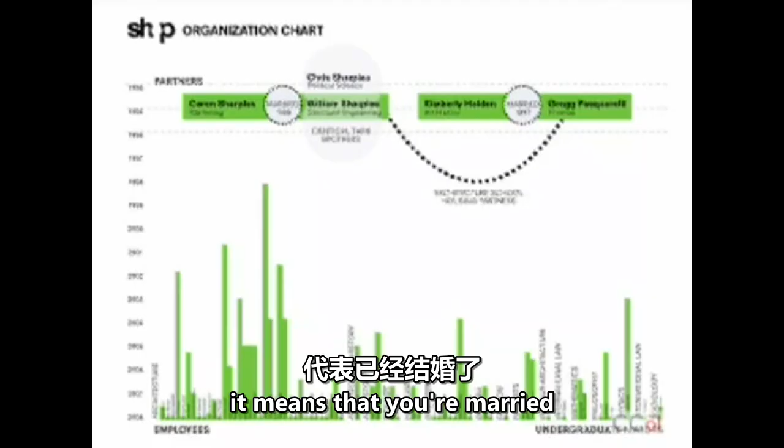All 5 of us went to Columbia, so that's the year we graduated with our MArch degrees. If you're in the green bar, it means you're married and share things like bank accounts. And if you're in the light gray blob, you're identical twins and share things like genetic code.

The partnership actually started when Bill and I were housing partners, which was the one semester at Columbia where you had to work in teams of 2.

One of the other interesting things is that all of us had other careers before we went into architecture—everything from fine arts and engineering to even investment banking. I think that's actually part of what we try to actively recruit at the firm, and here are some of the people who work at SHoP. We really try to look for that kind of diversity and an open think tank mentality, to bring other methods of problem solving from other fields into architecture.

The firm has grown quite a bit. It started with the 5 of us, and as of 2007 we were about 65. We actually grew to about 80. We're back down to around 60 at this point, and hopefully getting back to 80 very quickly.

But the 5 of us didn't really have a common stylistic sense. Because we came from other fields, we were a little confused, especially in the late 80s, early 90s, by architectural discourse, and the way architecture had been divided in the second half of the 20th century between paper architects—the people producing culture, thinking, and fantastic design—and service architects, the people who could actually put buildings together and knew how to get things done.

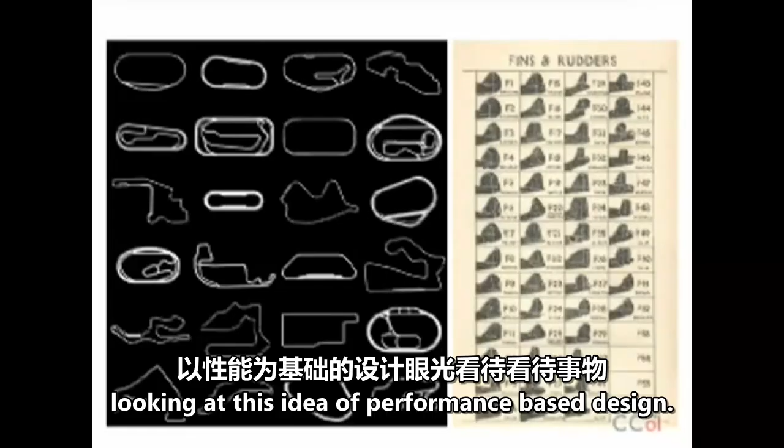One of the key things was that we wanted to move beyond a kind of style, so we started looking at this idea of performance-based design—design that wasn't coming from an image, but really trying to figure out how buildings worked, what they did, and how form could influence those things.

This was around 1996, and we were really looking at aerospace and the automotive industry as places where, although certainly not perfect, performance-based design was most engaged as a kind of thinking and a way of making that relationship between form and performance. And of course, the most classic place where performance-based design succeeds and fails is in nature.

We started to get this relationship down and got excited because we realized that when things worked well, they also sort of looked good.

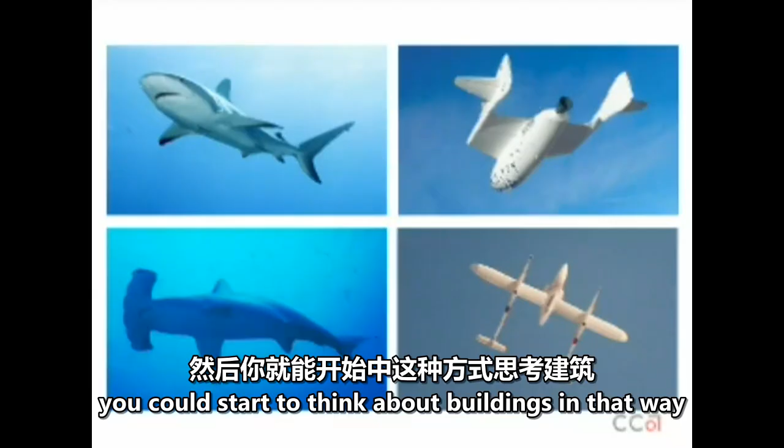And that was kind of exciting to us, that you could start to think about buildings in that way, and really began to use the emerging digital technology in the mid-90s, which was fast enough for us to begin to do simulations to really test if form and performance had a strong connection.

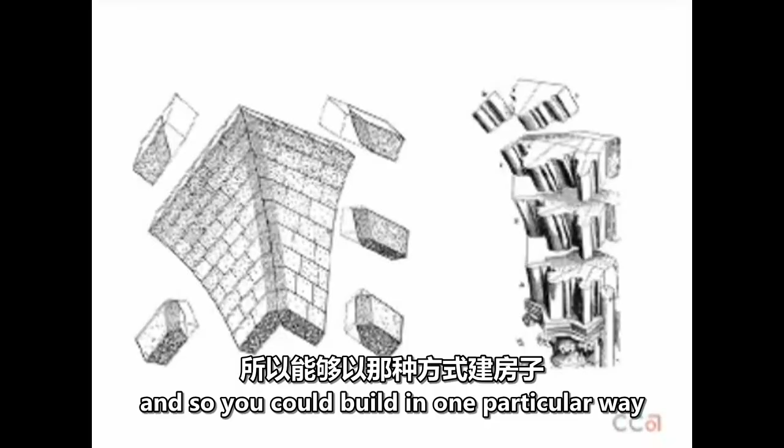Of course, we looked at the history of architecture and the production of material, form, and ornament and its connection to technology, and we saw these long-standing relationships. Even though the output from these experiments was often complex form, and there was this incredibly long history of complex form in architecture, the key thing was that when complex form was being made this way, it was all based on labor. Materials were expensive and labor was cheap, so you could build in one particular way. But in the latter parts of the 20th century and currently, it's labor that's expensive and materials that are cheap.

Very early on, we realized that the only way we were going to get some of this built, especially as a young firm that wasn't going to command the budgets that more established architects would get, would be to take advantage of CNC technology. So in 98, 99, 2000, we decided to invest all of our thinking into CNC technology and to start using the computer as a way to fabricate this, and to try and get towards the idea of mass customization.

Now one of the things that we started to realize, and I'll show it to you as we go through some of the projects, was that the notion of plan, section, and elevation really became a kind of limited language to us. There's something we're really trying to challenge there, and a lot of the investigation and research of the firm has gone into the idea of reevaluating if that's the best method for us to get our ideas across to the people who need to fabricate and build buildings.

For us, it really was never the form that mattered. It was how something was made and what it did that mattered to us the most. And the more we pushed into this realm, the more we realized we were kind of just going backwards in a way towards a kind of master builder sensibility, if you will.

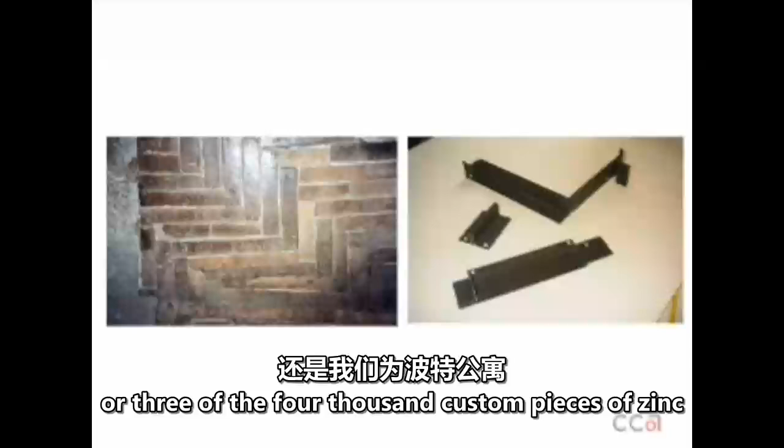So whether it's a few of the bricks from Brunelleschi's dome, or 3 of the 4,000 custom pieces of zinc we made for the Porter House, we realized that there were territories that had been given up by architecture over the past 30, 40, 50 years, and that it was time for us to start to grab them back and take responsibility and take risk and rethink the way in which architects could practice in order to push the limits of design.

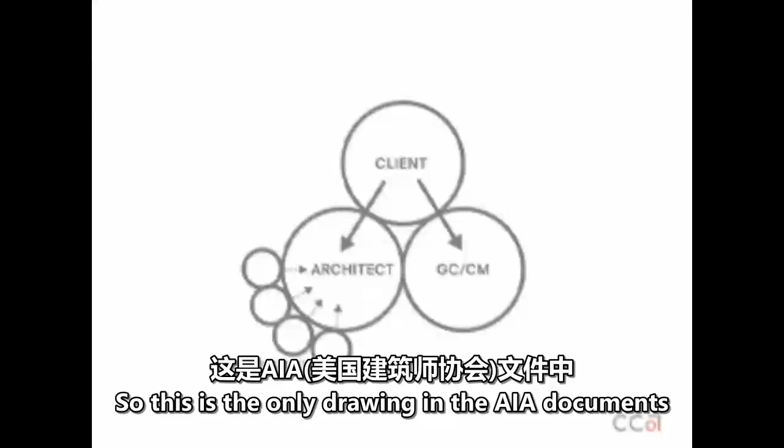So this is the only drawing in the AIA documents, and we have determined that this is the worst drawing ever made in the history of mankind. This is a drawing that is made by lawyers to try and make architects and owners and contractors fight in order to force them to have work for the rest of their lives. And I'm not kidding, I'm not being facetious.

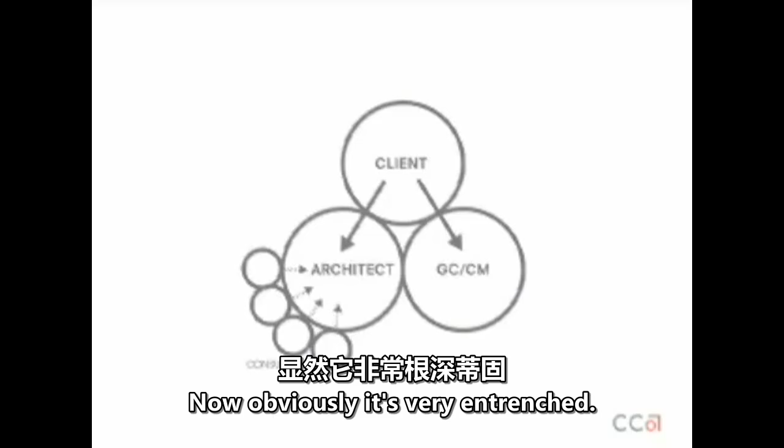So I think a lot of the way we've started to really push practice in thinking about it was to try and challenge this diagram. Now, obviously, it's very entrenched, and there are a lot of things you have to watch out for as you do it. But I think step by step, and what I'll show tonight is 6 or 7 projects that talk about how a young office tried to grab these things.

And just in each project, take one little step with R&D that both pushed the architecture, pushed the technology, and pushed this kind of structure behind the way in which things get made.

So very early on, I think the earliest one, and kind of the most obvious way to start, was absorbing the consultants into the design process. Now, of course, we're bringing the engineers in and the mechanical and structural guys, but it wasn't really that. It was actually bringing the fabricators and even the subcontractors into the office before we would even design anything.

So by saying, well, if we want to make something out of metal, let's bring metal workers in. How big are the sheets? How do you fold them? How do you clip them? What are the 8 ways I can bend it? What makes a bend expensive? What makes a bend cheap? How many sheets come in a package?

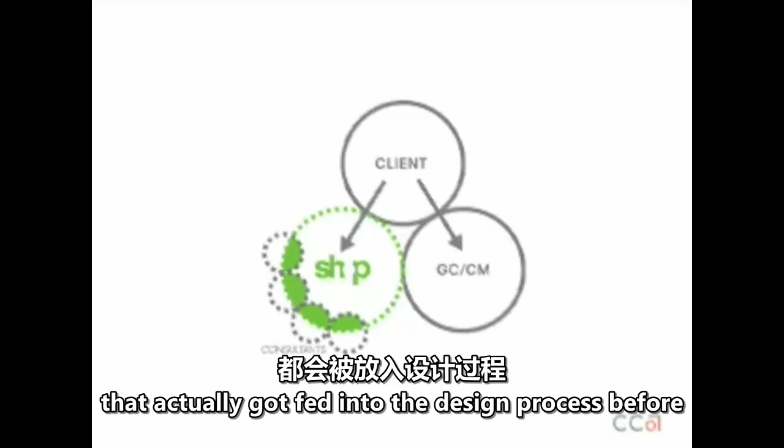And all those kinds of parameters were things that actually got fed into the design process before we ever sketched what we thought the building would be. I think that was an attitude we took right from the beginning that actually drove a lot of the work as it went forward.

Isla mentioned PS1, which we won in 2000, the summer of 2000. Most people are familiar with this competition at this point. The year before we won it, a young architect named Philip Johnson won it, which was interesting. They got about 2,000 people per weekend out to PS1 for this party called Warm Up. Alanna Heiss, the director of PS1, and Terry Riley, who at the time was the architecture curator at MoMA, said we should use this as an opportunity to let young architects experiment in the spirit of the houses that were built in the garden at Museum of Modern Art.

So our program was an urban beach, and the first question we asked was, how would you think about that performatively, and do you need sand and water in order to have an urban beach? We said, not really. If you had shaded areas, places to change, places to sit, places to move and dance, and places to get wet, you would in fact have a beach. So the idea was to take a series of surfaces and mutate those surfaces so that the program could evolve along those surfaces and the spaces that it captured.

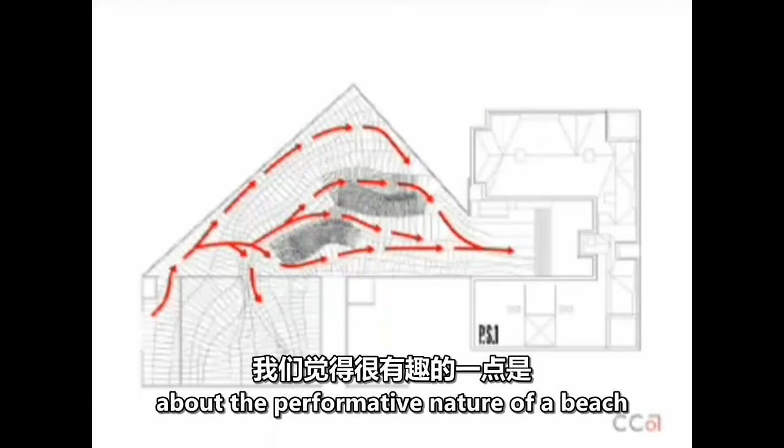Now, the other thing that we thought was interesting about the performative nature of a beach was the idea of the promenade. The fact that you either sit on the beach and watch everyone walk by, or you go for a walk and look for your friends, and there's always that interaction that occurs on a beach.

So this is the courtyard at PS1. Here's the museum. You enter here, this is the ticket booth, and then you go up these stairs, and that's actually the front door, and this is the sculpture garden. So we placed the architecture in such a way that the people hanging out at Dunescape during the day were the ones sitting on the beach, and the unsuspecting museum goers passed through the architecture in such a way that they became the promenaders.

And we had 3 weeks to design it and 3 weeks to build it, and a budget of $50,000 for an 8,000 square foot space. So we said, well, we better make it simple. It's the only way to do it.

So we said, let's take just one structural element, 2 by 2 sticks of cedar, and set them up in an AB configuration, the connection point being the spline that we pushed and pulled in order to make the surface bend and move so every one of those programs could unfold on the surface. This was the first sketch of that, and these were the early models. This is actually the model of the element. The reds are the A's, the blues are the B's.

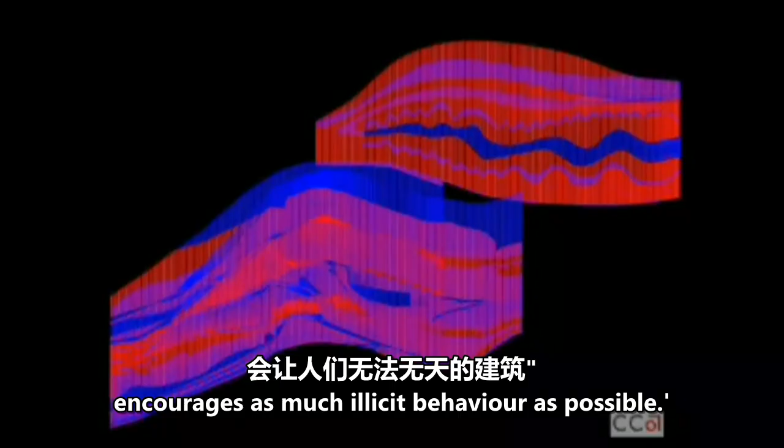And Alanna Heiss, she was a great client. She said to us, I'd like you to produce an architecture that encourages as much illicit behavior as possible. So we said, well, what do you mean by that? And she said, I'd like people to take off their clothes and smoke as much as possible. So we actually embedded huge ashtrays right into the thickness of the walls themselves, and all of the dimensions were taken for dimensions of the human body, meant for people to overlap and continually touch while they were involved in the architecture itself.

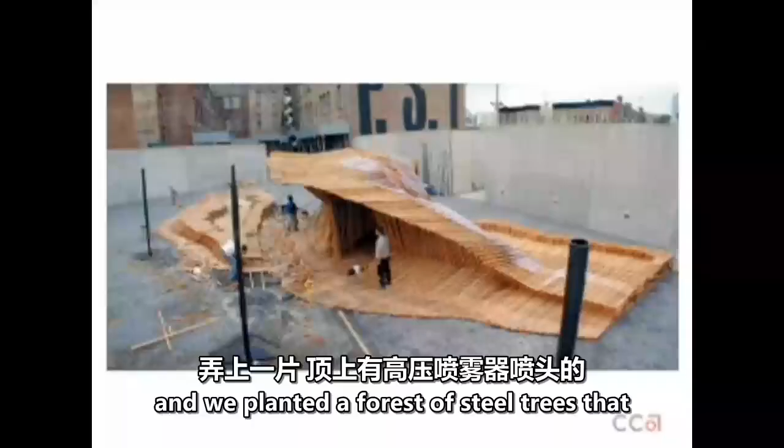And then we dug in the courtyard, and we planted a forest of steel trees that had high-pressure mister heads on top. Here's the Dunescape when it was finished. About every 15 or 20 minutes, they would blast and fill the entire courtyard with mist, which, as you were lying there baking in the sun, would be like the spray off the ocean, and would hit the cedar and wet it, giving this incredible smell to the whole courtyard.

But here you could start to see the kind of smooth transition from a bench to a wall, or from a shaded area to a pool.

This was the night before the opening. They gave us the courtyard for one night, so we filled the pool with beer and had our own party.

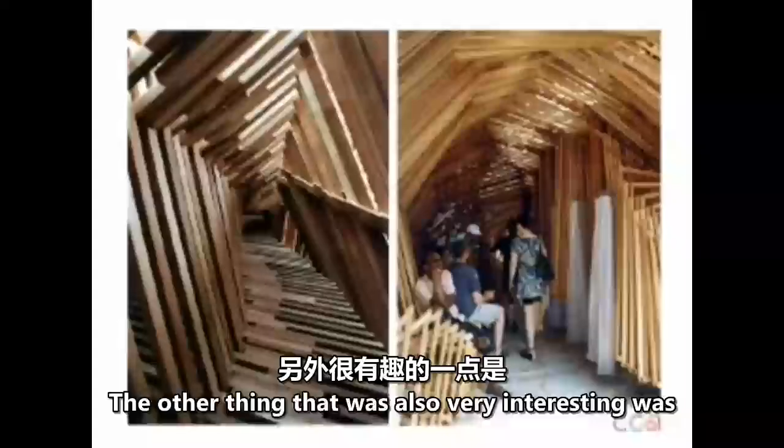And then these were some of the interior spaces. The other thing that was also very interesting was we developed a series of secret chambers inside the thickness of the structure itself, designed for 2 or 3 people at a time, that you could crawl inside and see everybody at the party, but nobody could see you. They were unbelievably well used all summer long.

And this was a typical day at Dunescape. And the interesting thing that happened was we got a lot of press from this, and people were excited about the architecture. We had so many articles that it actually drew more than 8,000 people per weekend.

As the summer was winding down, I was sitting there hanging out, and I said, that's interesting. 6,000 additional people times 10 weeks times $10 admission plus 3 beers and a hot dog or hamburger average, and suddenly I realized we generated about $1 million in additional revenue for the museum that year, and our fee was $12,000.

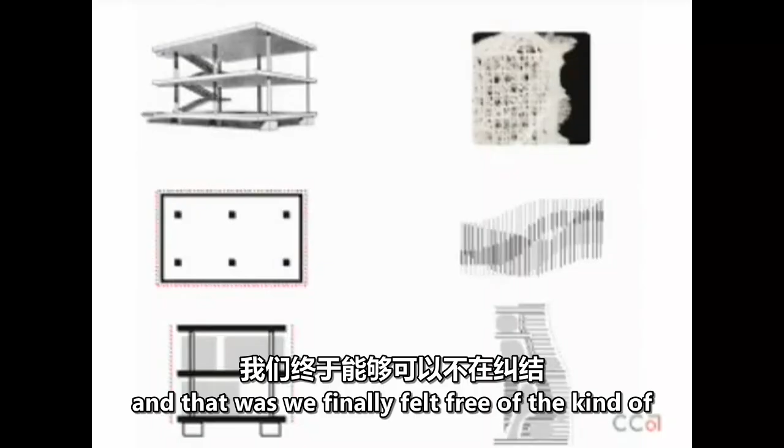And I said, something's really wrong with this architecture thing. We've got to try and fix it. But I think there was something very interesting that happened at that moment for us, and that was we finally felt free of the kind of modernist canon of the separation of structure, skin, and program.

We started to get very interested in the notion of thickness - the idea that surface, structure, and program could be blended into a single thickness that could be mass-produced and mass-customized, if you will. It's really still the idea pushing a lot of the work we're doing in the office today. So from a very little project, it's now working on projects anywhere between $500 million and $1 billion currently in the office.

Talking about that journey, I think there were certain things we did learn that we applied to some other little projects right around that time. Richard Branson saw PS1 and asked us to do the first-class lounge for Virgin at Kennedy Airport.

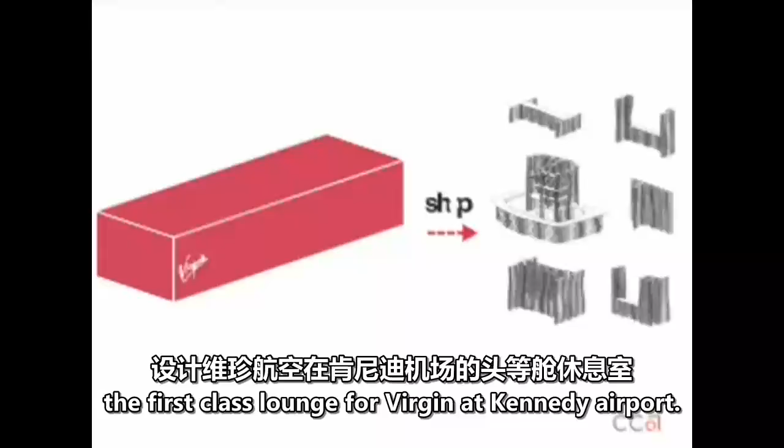The idea is that typically a first-class lounge is behind a closed door and you never see it. The idea here was to make a first-class lounge that was almost a billboard, an aspirational billboard, if you will, that you could see but couldn't really get into, that might encourage you to upgrade to a first-class ticket.

It's funny, I just saw this for the first time in a year because I took Virgin Atlantic out this morning, and I knew something was missing. They removed that part. Anyway...

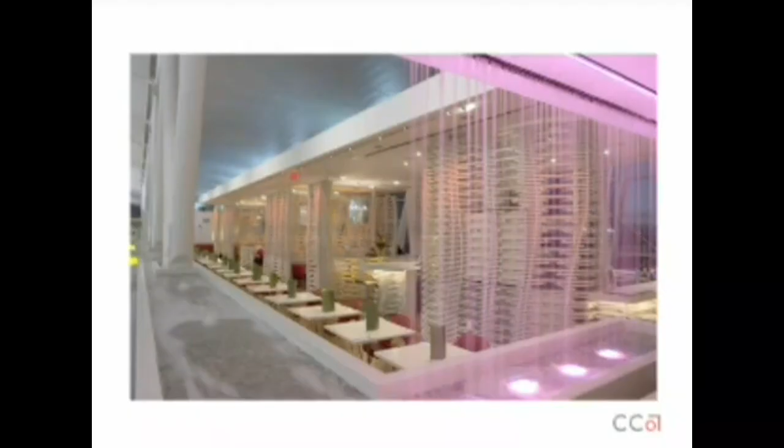You check in over here, and you can see right through the screen out to the runway through this lattice work that holds the lighting and the structure and all the forms. But as you move into the space, a kind of moire pattern emerges that gives a certain intimacy to the spaces themselves. There's a waterfall and a stream that blocks the sound qualities of the airport.

Can you see that? Yeah, you can. So again, this was one of the first times we really got into developing nesting drawings for the mill to fabricate pieces.

All the parts were made into component pieces that could be delivered to the airport and assembled in a certain sequence that would get us around a series of rules with the Port Authority.

And there's a whole lighting system that goes from yellow to orange to red that's timed with when the flights to London are leaving. So the redder the whole space becomes, the faster you have to run to the gate to get there.

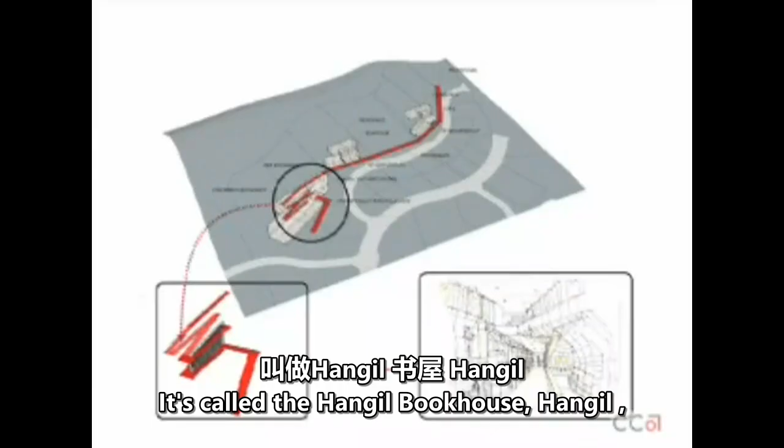It also brought us to a project we did outside of Seoul, Korea. It's called the Hangil-sa Book House. Hangil-sa is sort of like the Rizzoli of Korea in a way, and it's part of the Heyri Art Valley complex.

You actually come off the hillside and enter the building at the top, and then walk down a ramp around a 3-story high wall of books that are the bookstore itself, and come down into a kind of restaurant and cafe space. And there's a sculpture garden here.

We prepared all these drawings, and it got fabricated in Korea and assembled like a kit, and it worked pretty well. Here you could see the bookstore as you come down and move around, and sort of what the building looks like at night.

The more we were getting involved in this, the more we realized there was a lot we were doing with the contractors and the construction managers to actually get this stuff built. On one project, Mitchell Park, which was a competition we actually got third place in but eventually got the commission to do, out on the eastern end of Long Island, about 120 miles from New York City.

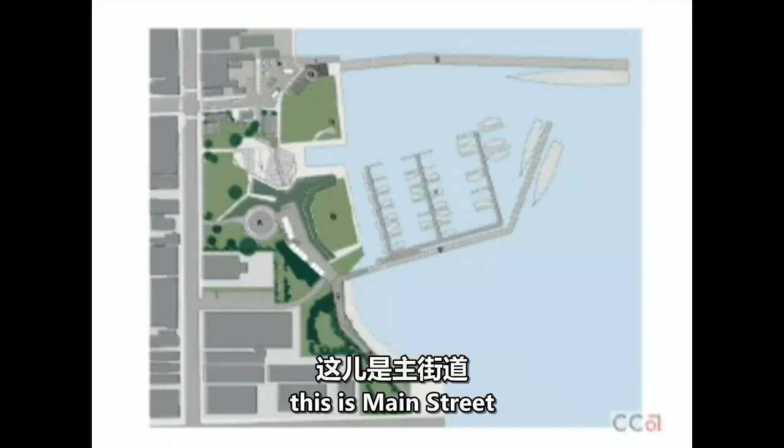It's a rural fishing village. They had a 4-acre open spot. This is Main Street, and that's Front Street there. There was a big open lot, and they held a competition to build a park. They had a series of programs they suggested, but really only a few they insisted upon, and the key one was a carousel.

The town's prized possession was an antique carousel given to them by the Grumman Corporation in the 60s. It sat in a Butler building right here on the corner, and they charged $1 a ride, getting about 1,000 rides a month.

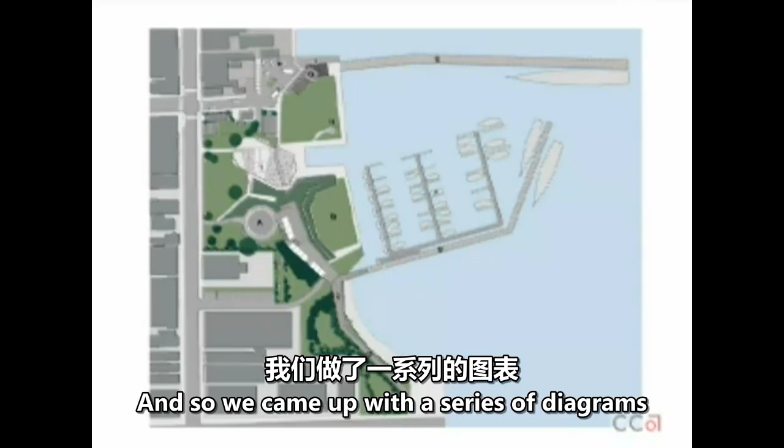So they wanted a new carousel house in the park, and of course they wanted it to be a Victorian carousel house. We came up with a series of diagrams, and this idea of almost like a chain that went through the middle of the park, a necklace, and all the programs linked off of it.

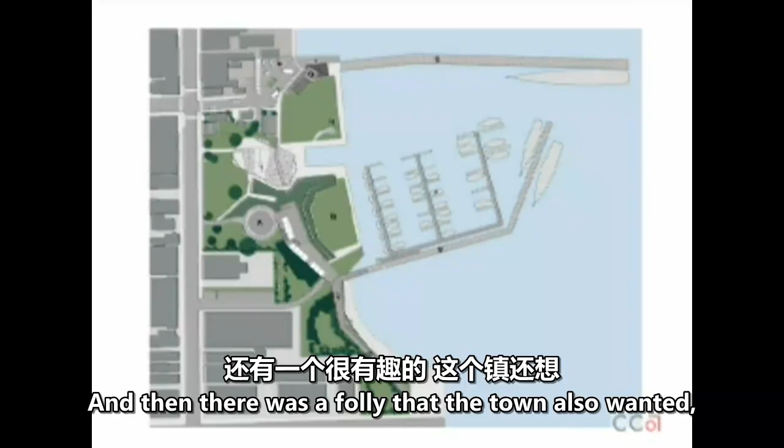There was an amphitheater, the harbor walk, a shade pavilion, and a water garden that turns into a hockey rink in the wintertime, and some playing fields. Then this is a ferry terminal. And then there was a folly the town also wanted - they wanted a camera obscura, but I'll talk about that in a minute.

So we worked on it. Here it is. It actually took 8 years from start to finish. We eventually wrote grants for the town. It was built in 3 phases. We did soil remediation ourselves - we got licensed to actually do soil remediation in the state of New York because we couldn't get anyone to do it.

We built this carousel house, made of 16-foot high by 16-foot wide bifold steel and glass doors that work on a worm drive and respond to the local weather patterns on the site. As the prevailing winds come off the water, it closes down. On hot days, it opens up.

In the winter, it's completely enclosed, but it can operate all year long. Just by writing the performative rules of what this piece was, we actually convinced the town that this was, in fact, a Victorian carousel house.

Here's the ferry terminal and the harbor master's house. You can see the water garden in action over there. Here's the water garden at night, and the shade pavilions where they have farmers markets on the weekends. And then in the wintertime when it turns into a skating rink.

And then the last piece that we were going to make - we started this project in '97, and this was now about 2000, well, we started working on this maybe around 2001 or 2.

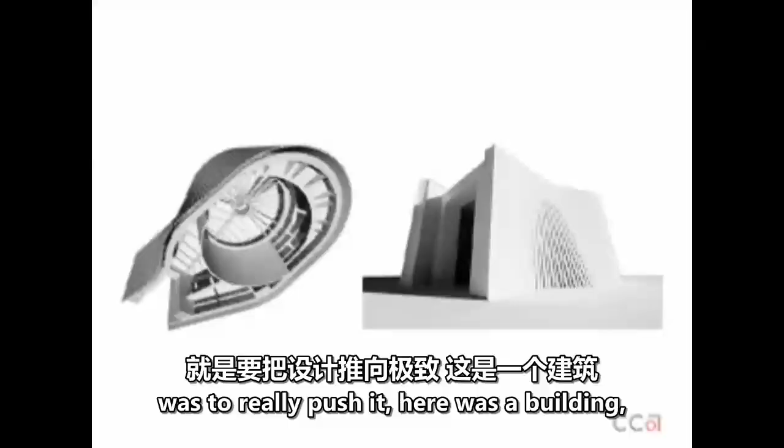I think the idea for the camera obscura was to really push it. Here was a building - we'd learned enough about using the technology, and it was a small enough building, and we had gained enough trust with the client that we really wanted to push it to see if we could make a sort of pure performance envelope.

We wanted to see if we could have the entire building fabricated by the computer. So there was a certain series of programmatic requirements. We tried a kind of minimum surface form. This was sort of BIM version 0.01, where we just modeled every single piece for the building. And these are the construction documents.

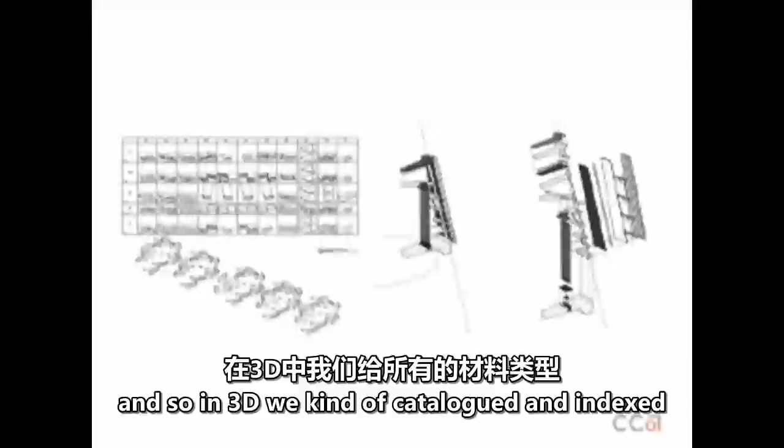In 3D, we cataloged and indexed all the different material types so you could see where they went. There were basically 2 kinds of drawings in the set: drawings that explained to the computer how to make the parts, and drawings to the contractor how to assemble them.

We basically produced the whole set, and when we were done - these are the actual construction documents. There's nothing, these are not presentation drawings. These are taken straight from the set. You know, fold, weld, bolt, screw.

And the interesting thing is, when we were finished with it, we looked and realized there were no dimension strings on the whole set of drawings, because they were totally irrelevant.

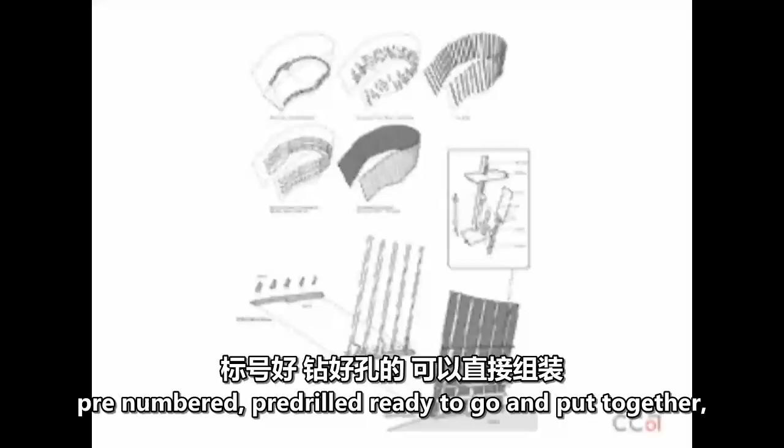Every single piece arrives on site pre-cut, pre-numbered, pre-drilled, ready to go and put together. In fact, the worst day on the construction site was when Mark Hours, one of our guys, heard one of the contractors start a saw and ran out yelling don't cut anything, because the guy had actually just picked up the wrong piece, and it didn't fit, so he was going to trim it to make it fit. But there was no saw needed, and in fact the contractors didn't have tape measures on their belts for the whole process because they were irrelevant.

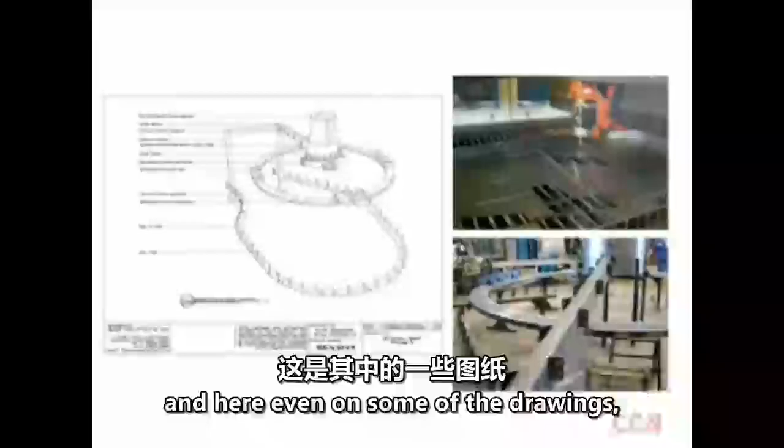So here are even some of the drawings. You can see the equipment making the pieces, even the templates. These are the flanges on the compression ring, and we laser cut into the parts instruction sets on where the welds go and which piece lines up where. It was all there to make them look at the drawings as infrequently as possible, and just be able to build it like the most kick-ass piece of IKEA furniture you can imagine.

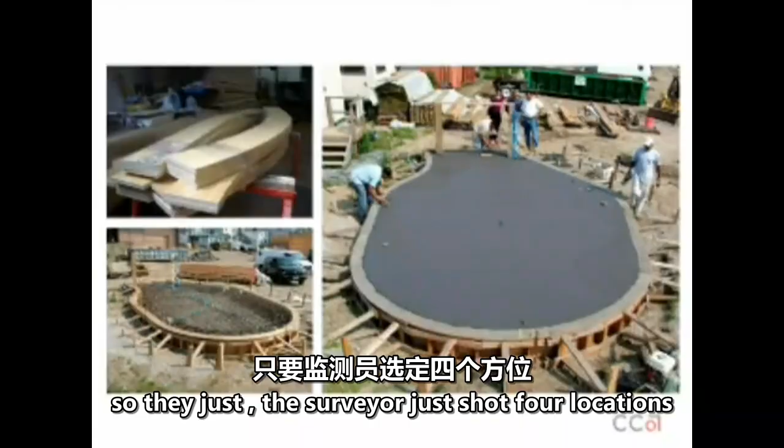And even the formwork was all milled as well. So the surveyor just shot 4 locations and then full-scale templated it out. They dug the hole and assembled the pieces, and I think it was 4 guys who built it in about 7 or 8 weeks. And the piece went together. And that's sort of the interior.

And it was a really phenomenal thing for us, because we realized for the first time that, okay, there's something here — you can actually build buildings this way. I mean, no one is ever suggesting that you build a 45-story building like this; that's not the point. But what you can do is find the critical parts of your building and invest a tremendous amount of time into thinking about how to do things this way, and then a lot of the rest of the building can be built in very standard methodologies. You could really see that this was something that was going to pay off a lot for our profession into the future, and it gave us a lot of confidence to move forward into larger projects.

So we started realizing that we were really doing a lot of good things for our clients, and also making the money. The last thing was that on the park they were getting 1,000 rides per month, and now with this new Victorian carousel house that they love so much, they get upwards of 50,000 rides a month in the summer, and it's actually up to $2 a ride now. So it's generating hundreds and hundreds of thousands of dollars for the town, and they've planted flowers up and down the whole main street, and their real estate market's gone through the roof, and it's even held on in the downturn.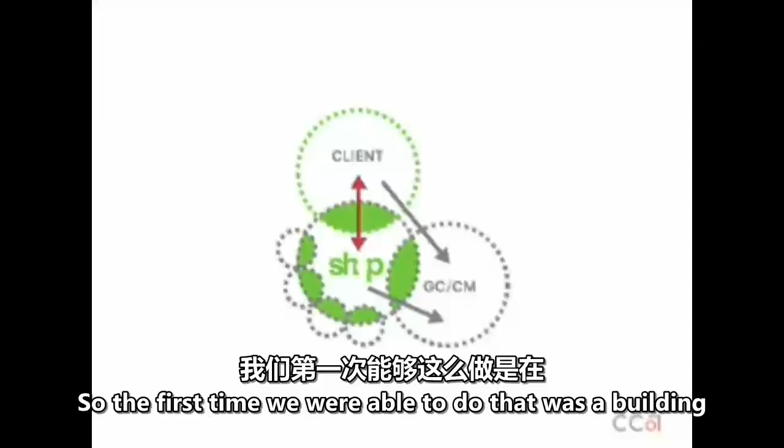So with that said, we started thinking, is there a way that we should start to team with our clients, where if we're coming up with all these ideas that are solving problems and turning design from a cost center to a profit center, should we begin to joint venture with our clients and be able to take the risk along with them? So the first time we were able to do that was a building called the Porter House.

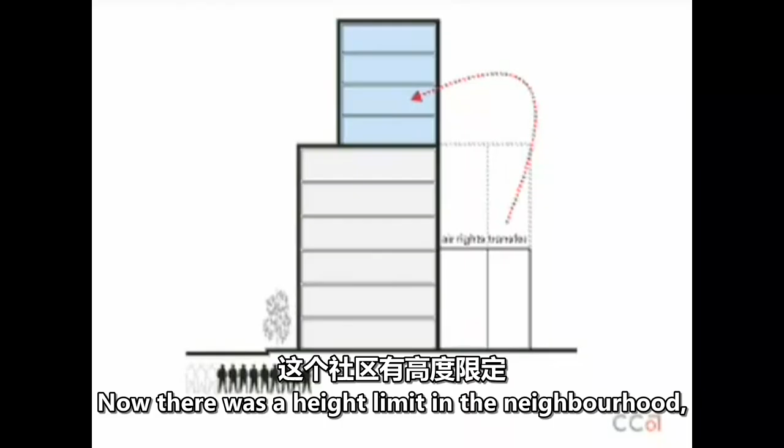It was in the Meatpacking District of New York, and there were 10 developers fighting for a 6-story turn-of-the-century warehouse building. The owner was trying to sell it and obviously wanted the most money for it, and I think everyone was trying to think about how they could raise their bid to get control of this building. There were 2 smaller historic buildings to the south, and this building was built to its full FAR. Maybe 7 out of the 10 developers thought about doing the air rights transfer. Now, there was a height limit in the neighborhood, and there's also a setback requirement from the street, so that was the sort of first thought — how much air rights we could transfer.

But then the next idea was the only way to increase the size of this addition, and therefore the potential revenue down the road, which would give you a little bit more money to outbid the other developers, was to cantilever over these two historic buildings to the south.

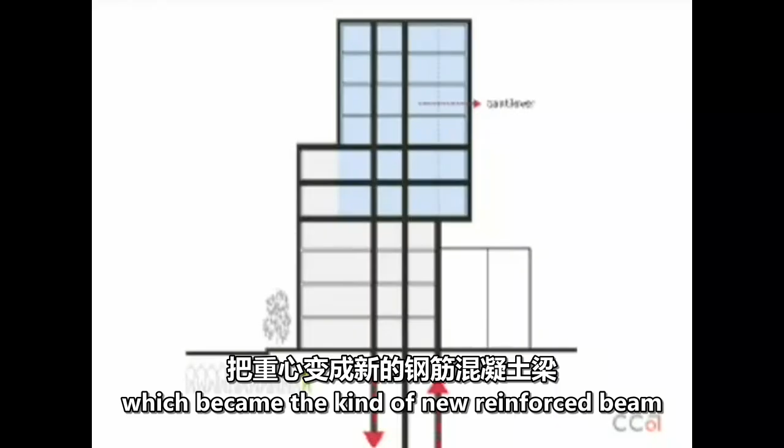Working with Buro Happold, our structural engineers, we came up with an interesting way of moving the core, which became the new reinforced beam, and we put a sort of three-story Vierendeel by building a six-story new building onto the six-story old building, but overlapping on two floors, to in a very inexpensive way get that cantilever out a little bit further. Those extra couple feet were enough additional revenue to allow us to be the last one who could bid the most to get control of the building.

So we didn't really have the money to do any of this, but we went for it anyway. We approached one of our clients and said, do you want a joint venture on this? And they said yeah, it's really interesting, Jeffrey Brown. So we were going to take this new box and put it on top of a historic building.

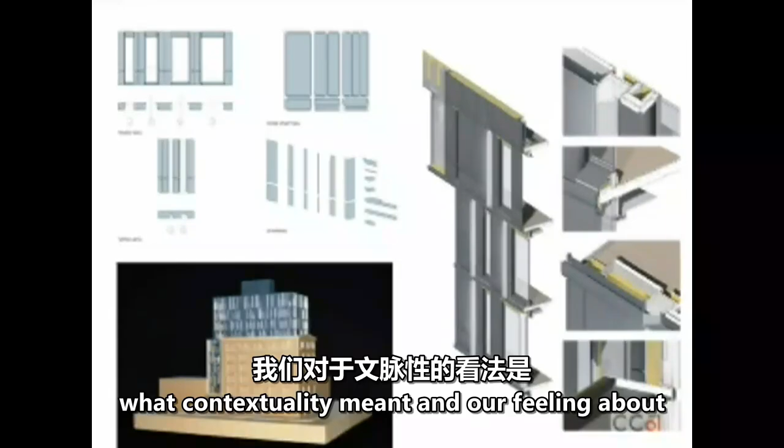I think we really wanted to push the idea of what contextuality meant. Our feeling about contextuality was that it shouldn't be contextual at all. So we took an idea where we said, let's make it zinc. We wanted to use zinc and make a metal panel building. We hadn't tried that yet.

So we talked to lots of zinc fabricators, and the prices were ridiculously expensive. So what we did was we actually went to France, where most zinc comes from, and bought one meter by three meter sheets of zinc, about 1,000 of them. We designed the panels in such a way that one unfolded sheet fit on a sheet of raw material, or two sheets on a sheet, or three panels on a sheet.

We took four window sizes, all the same height, floor to ceiling, and then we had these two light boxes, a thin one and a thick one, and it made about 22 protoforms. We then played around and wrote an algorithm to spread these panels and pieces all over the building to almost make a kind of cloud that sat on top.

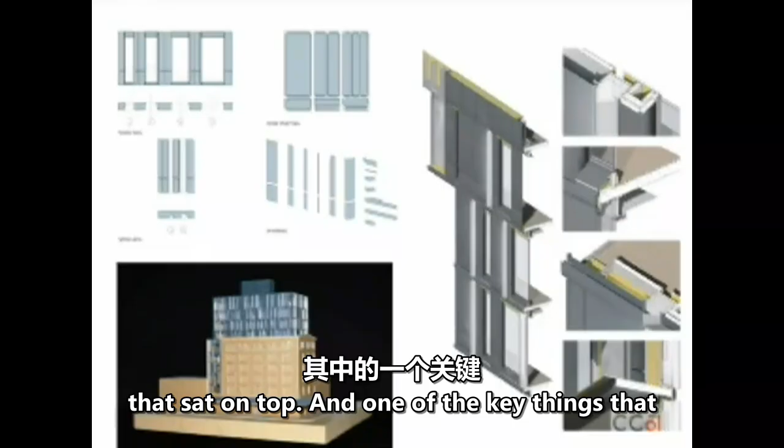One of the key things we felt was that, for us, when you're doing metal buildings, sometimes when the glass and the metal are in the same plane, it gives a kind of thinness to that facade that we didn't really like. We really wanted to have depth and texture.

So we ended up pushing the glass back 14 inches everywhere on the building, which of course immediately made us think, well, we're going to have ledges everywhere, and in New York we have pigeons everywhere, so we figured we're going to have a huge pigeon problem.

So we actually called the Museum of Natural History and asked them if there was an angle of repose for a pigeon. They told us that if you had something that was 35 degrees, a pigeon would land on it and slide off the edge. So if you look, there are these panels in front of every window that have a 35-degree slide on them.

At the end of the day, there were 4,000 different pieces of zinc in over 480 unique shapes. So to draw all of that in shop drawings would be impossible, right? You just couldn't do it.

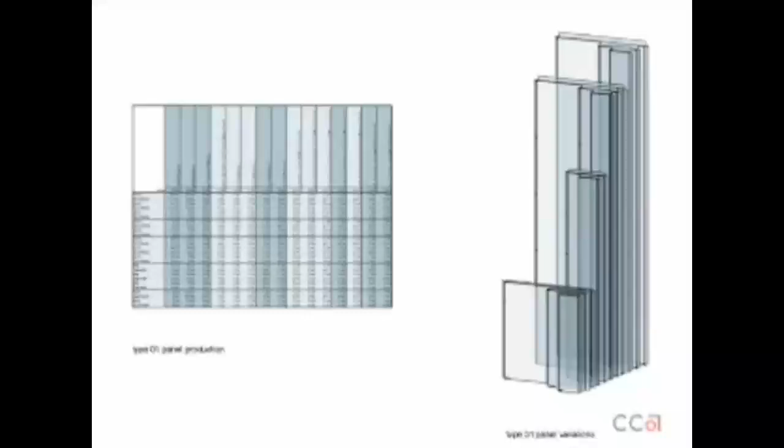So this was the first time we played with SolidWorks, and we just drew the panel prototype and then fed all the differences into the spreadsheet, and it went directly from this spreadsheet to the laser cutter to cut all the parts. So there were actually no shop drawings made whatsoever.

So all the panels got labeled, and that was laser cut right into the facade. That was the instruction set as to where the pieces would go on the building, where they would lay out as it was getting built.

So again, we were like, okay, this stuff works, this is a good idea. And they were condominiums, and we did everything - the interiors, the collateral materials, the lobby. Here you can see the cantilever portion of the building and the setback terraces and the pigeon slides, which were labeled PS and then their number.

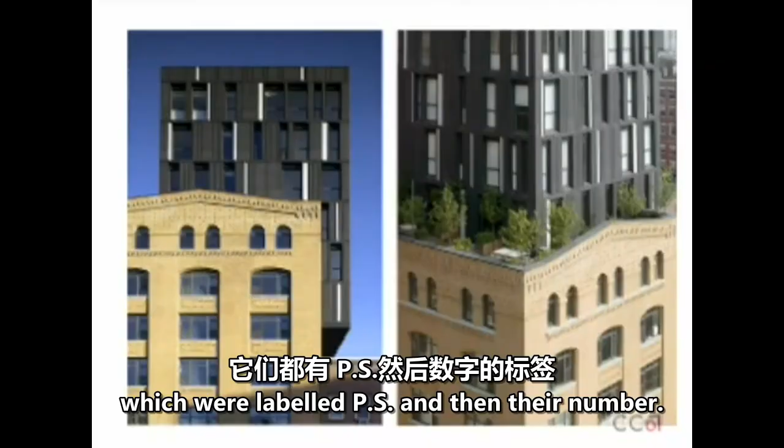And it's just going forward. You can see the kind of depth in the paneling.

And we designed all the collateral materials. We brought them to market and sold them, and it's a retail space in the base, and it's 22 units above.

Jason, are you here? Jason Anderson? Were you there the night we all went out drinking? We turned the lights on the first night?

Yeah, oh yeah, sorry. But there was one I remember, which was we all went out after, I think, a softball game, and we went to the meatpacking district, and we called them, they flipped the lights on, and they went on, and we were like, hooray, and stayed out till 4. And the next day, I think I woke up with a really vicious hangover, and my lights weren't going on in the apartment, and it was the blackout that had hit the East Coast that night. And for like 30 seconds, I was just like, I hope we wired that thing correctly.

But that worked out very well.

And the interesting thing, and here was the amazing thing about the Porter House: when we were going to do this, a lot of our colleagues, my fellow professors, a lot of our friends, they said, don't do that. You're going to get in bed with the developer. You're joining the evil empire. You've gone to the dark side. It was really, we were sort of threatened in a lot of ways.

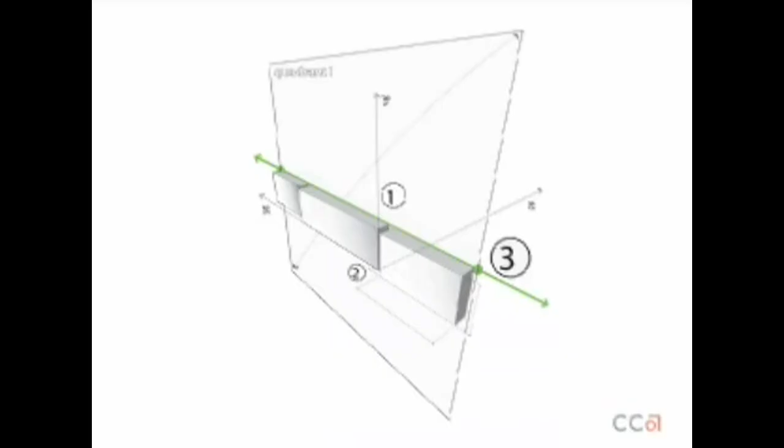So we kind of tried to think about what could we do with bricks. And the idea that we came up with was, could we begin to use the fabrication techniques in order to make custom formwork that we could drop bricks into and do precast panels, where the custom formwork lets you get any sort of position of the brick in the X, Y, and Z. You could pour the concrete on behind, and you could lift it out and get any shape or placement of the brick in the panel that you want.

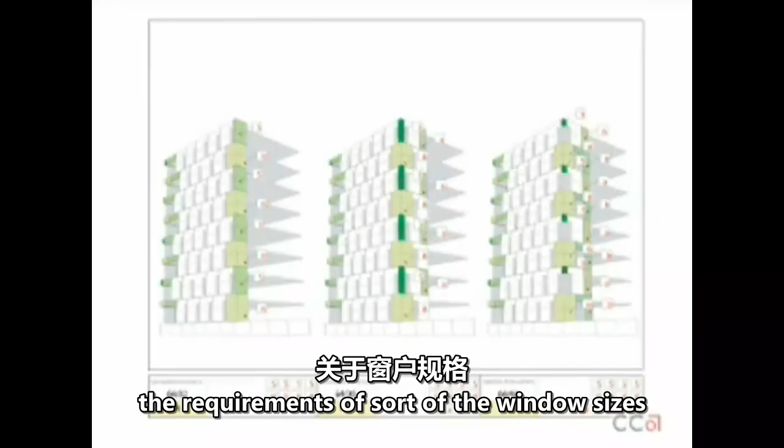So we studied tons of different brick patterns and overhangs, and worked on software that let us analyze different sort of panel shapes and the way in which the panels and the sine curves would match or not match or come together, and the orientation of the brick. We looked at the requirements of the window sizes, the setbacks, and the building envelope, but tried to make the least number of eccentric panels versus standard panels possible.

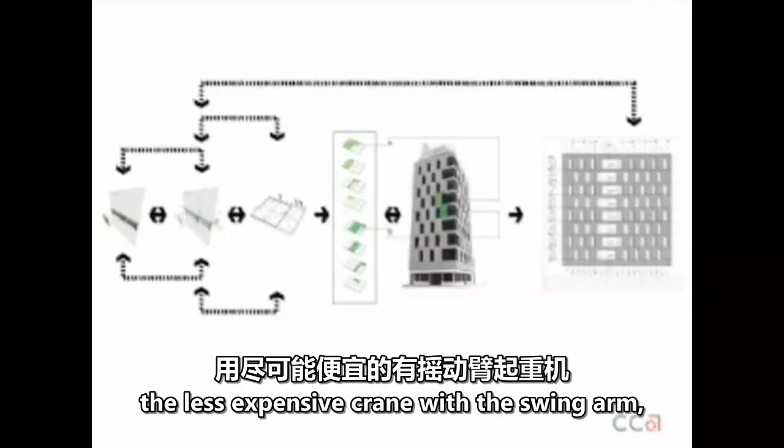And it really kind of developed this interesting feedback loop that we were able to drive the design out of, including how big the panels were, what was the biggest panel you could fit on a truck that could get into Manhattan through the tunnels and bridges without special permits, and how many panels you could make to have a less expensive crane with a swing arm with the least number of picks to get the panels onto the building. All of that really drove a lot of the design.

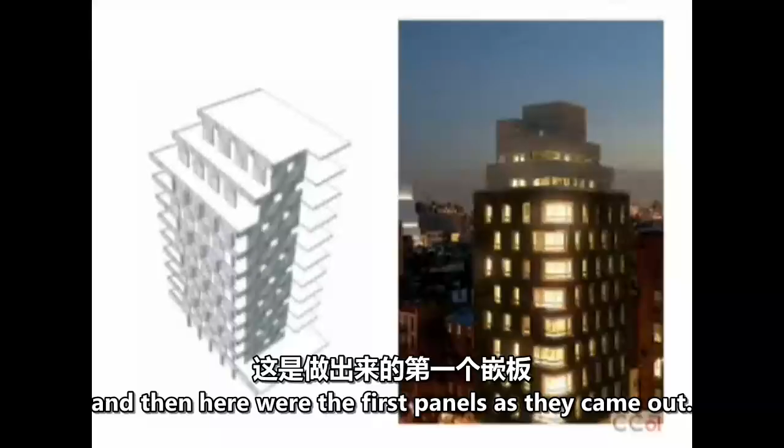This is kind of what we thought the building looked like. And then here were the first panels as they came out. We picked this chocolate brick with a dark gray joint, mortar joint. This was in the summer with the panels going up.

This is probably October or November. And it looks pretty cool.

Then this is the side that doesn't count, since it's only the facades on the street line where you have to follow all the rules. So people have these balconies, and then there's this 3-story high glass staircase for the penthouse. And this is kind of interesting.

There's actually a small rule in the New York City Building Code, which allows a certain percentage of your building to go over the property line, put in place in order to get detail like cornices and window surrounds. We were actually able to calculate it to the brick, exactly how much of the building was going over the property line.

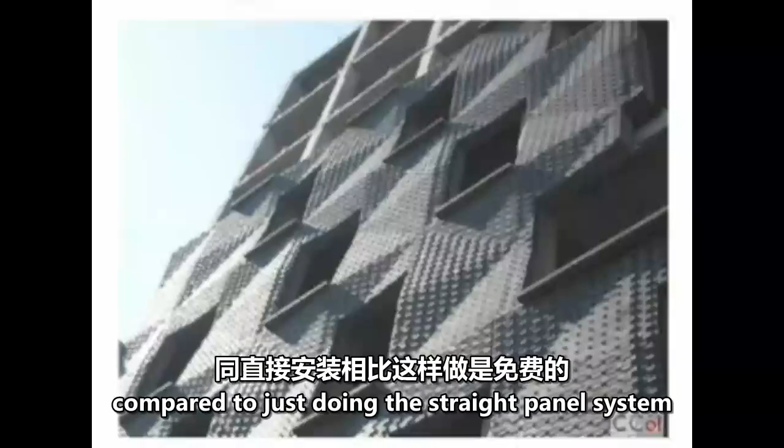By giving the building department that much detail, we were able to push out the entire perimeter of the building by 6 inches. Now, that doesn't sound like very much, but the fascinating thing was that 6 inches times the perimeter of every floor times every floor gave enough additional revenue that it actually paid for all the custom molds. So in fact, that was free compared to just doing a straight panel system. I know it's incredibly nerdy, but we get really excited with that stuff.

Other times, we've worked as an advisor to our clients. A competition we did back in 2005, in fact how I met Isla, way back in her Tulane days, was to do a new building on the campus of Tulane. This was going to be the Murphy Institute. It was attached to an existing building, which was one of the only buildings that wasn't orthogonally oriented to all the other buildings on the campus.

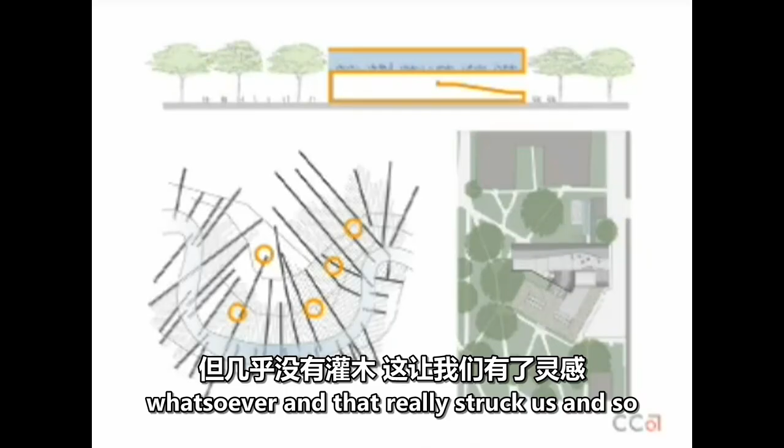The things we noticed about the campus was that it was incredibly flat, had this very thick tree canopy, but almost no shrubs whatsoever. And that really struck us. So I think the idea of the project was to float as many of the classrooms in the tree canopy and keep as much of the ground plane open as possible.

And then we looked at the ways that New Orleans had always dealt with its geometric anomalies. We used some of the same techniques that we used at PS1 in order—it was an ethics, economics, and philosophy building. Is that right, Isla? The Murphy Institute.

Reed and Isla and Martha had all said to us that they wanted a building that was going to get people talking to each other from different programs. So we used these structures to encourage cross-disciplinary pedagogy and interaction.

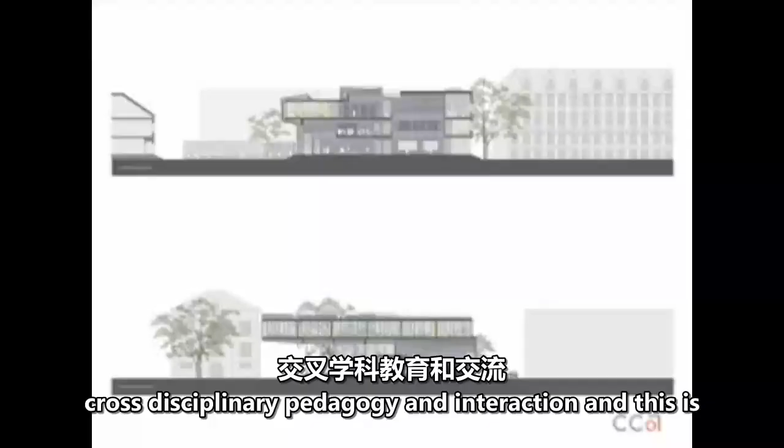This is actually the historic building with an atrium carved out, and this is the new building behind it. The students can move right through. Here are the classrooms and the big lecture hall, and the students move through over here. And these are some images from the model.

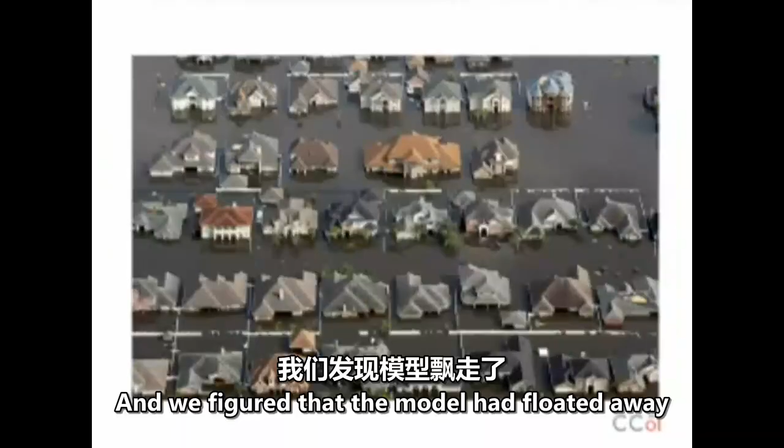We were really excited about it, and we were fortunate enough to win the competition, and spent the summer negotiating the contract. We came to an agreement right around mid-August of 2005, and we were supposed to go down there right after Labor Day, and then Katrina hit, and we figured that the model had floated away somewhere, which was down there.

But about 4 days after Katrina hit, Martha Murphy, the donor, called us and said, 'I live in Pass Christian, Mississippi. All my homes were destroyed. I'm living in a trailer, and we need some help. We need someone who knows how to get something built. Will you come down there?' So we said okay. We went down.

This is Pass Christian on day 7 after the storm. That's Main Street, about a block off the Gulf.

That's Martha's house, and it was a fascinating thing.

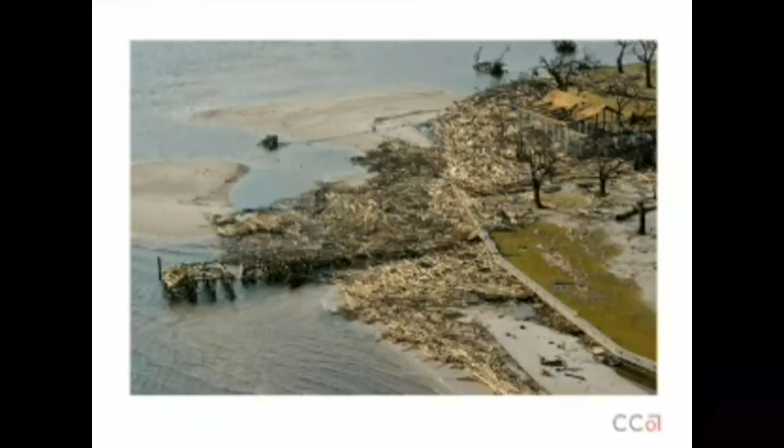So we went down, Chris Sharpless and Craig Schwitter. Craig Schwitter's the head of Buro Happold, New York. No one believed that we would actually camp. Yeah, I'm from New York, we don't know how to camp, and so they made us take pictures of that.

There's Craig talking to everyone. Craig was one of the guys who was on the pile the night of 9/11. He was one of the 6 engineers asked by the city to help take the steel down while they were still trying to do the rescue efforts. And we did the first piece of infrastructure built at Ground Zero, the Rector Street pedestrian bridge.

It's terrifying, but between FEMA and the Red Cross, no one really knew what to do. The fact that we had worked on 9/11, albeit in a superficial way, suddenly we were in charge because we had actually dealt with a crisis before. A lot of the government officials were told, well, we really can't do anything. They were great people who wanted to help but were instructed not to, which was a fascinating and eye-opening experience for us.

So Martha owned this piece of property. It was covered with woods, right across from the elementary school. She said, I want to build something. I want people to think there's still going to be a town here someday.

And we had no idea. There was no electricity, we were sitting in tents at night. So we just said, okay, we'll build two 10,000 square foot sheds, and put a giant porch on it, because this is so much about porch culture.

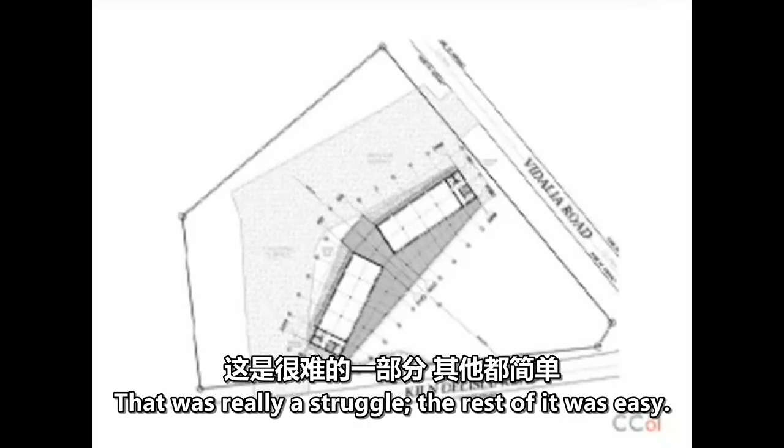So we made an entryway you came through with signboards and information kiosks, and then this big porch where the town could come together. We had no idea what would go in there. Martha said, do something at least cool, don't make it look like a FEMA building. So we made this roof, this kind of big wing roof.

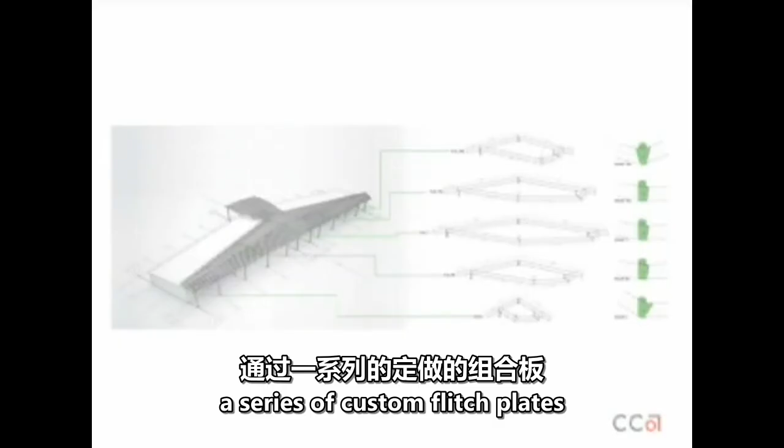We had very little skilled labor to work on it. They were either working on the big projects downtown or had left. So the way we got the complex form done was through a series of custom flitch plates that we had cut in New York and sent down.

Here they are clearing the land. It got built in about 8.5 months. This was right before people started moving in. Now it has a laundromat, a beauty parlor, a law office, a restaurant. It's the seeds of a town.

There are lights up inside the wing, and it glows at night. That was the building, and we got it. The interesting thing is it was the first building completed in Mississippi on the Gulf Coast after the storm, so it was an amazing experience for us.

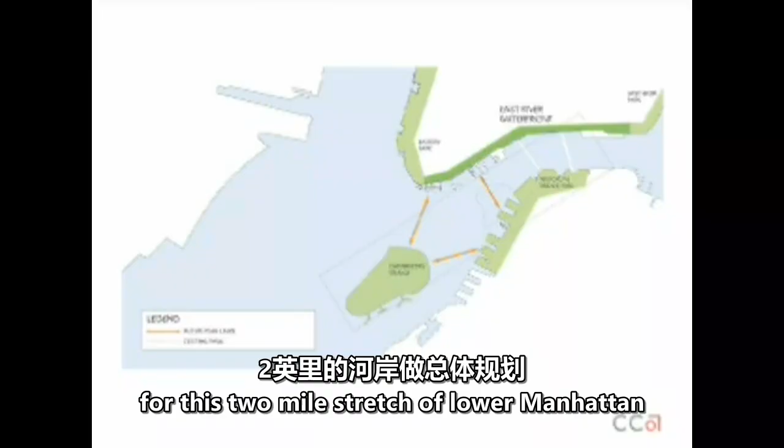Another project where we worked with a client to advise them on what to do with the city was on the East River waterfront. This was a competition we entered with Richard Rogers and Ken Smith, landscape architects, and Buro Happold as well. We won the competition to do a master plan for this 2-mile stretch of Lower Manhattan, mostly underneath an elevated highway, similar to the Embarcadero freeway before the earthquake.

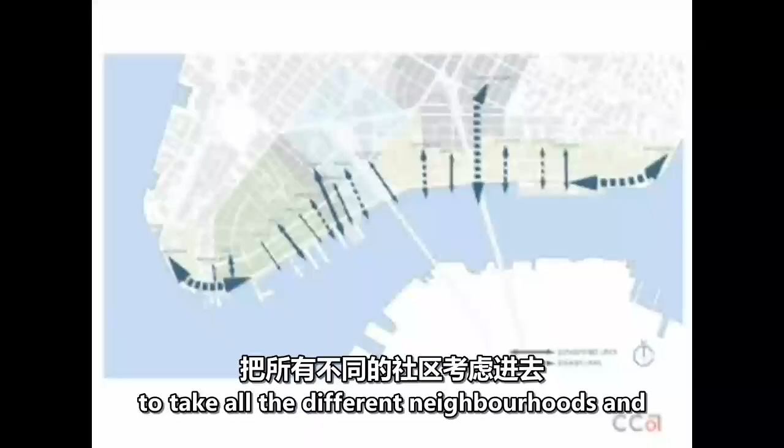Between the infrastructure, there were some places with more than 12 layers of chain link fence from where people lived to the waterfront, just no access whatsoever. Or these beautiful, this is an 18th century square at Peck Slip that was being used as a parking lot. So the basic idea was to take all the different neighborhoods and figure out a way to make the cross-grain connections work to get people access.

So we rented a helicopter and flew over all the shorelines of the 5 boroughs of New York and developed a taxonomy of shoreline types.

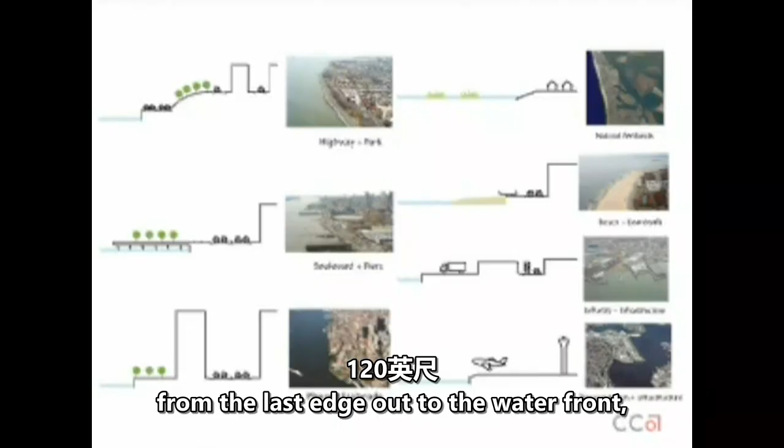And there were only a few places where the buildings got really close to the water. So this is kind of where we were. There was sort of a street here where people actually worked. Then here there was almost 120 feet from the last edge out to the waterfront, then a chain link fence.

So what we said was, look, if you just sort of get rid of the parking underneath there, add trees, bike lanes, and instead of thinking of the overpass as a big, ugly, dark thing, think of it as a free roof, and build these inexpensive boxes underneath that you could fill with recreational and community and cultural facilities to make a new kind of esplanade or park where the city actually comes out to the waterfront. So this was an early idea with the glass boxes.

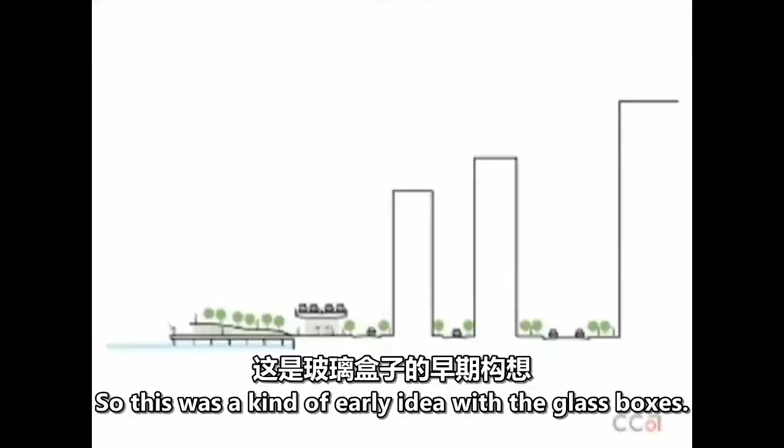We had to build up the planters because there was no soil below, plus a bike lane and sidewalk. And at that time, Richard started getting a lot of other commissions in New York, like part of Ground Zero. He got WTC number 3, and the convention center.

So then there was a second competition to see who would actually design it and do the drawings. And Richard was like, 'You guys can handle it, I'm busy with other stuff.' So we went after it again on our own, and we were lucky enough to win it a second time. And they still didn't understand what would go in these pavilions underneath. So we were like, 'Well, look, we don't know either, but it could be anything.'

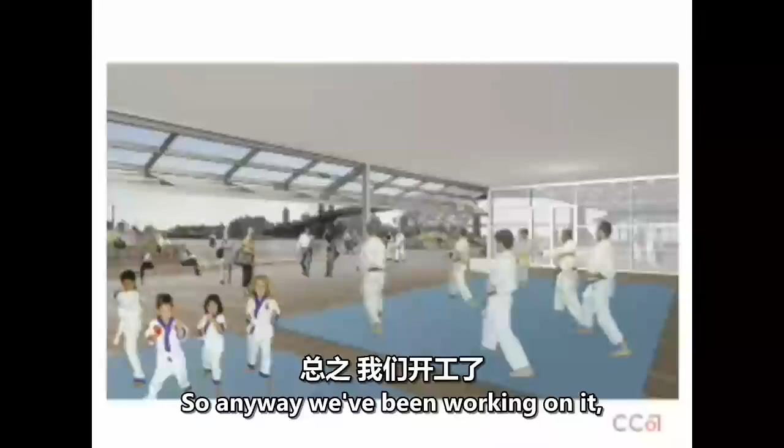So anyway, we've been working on it, and this is some of the later drawings. This is what the pavilions look like these days. We're in the last months of drawing it, and parts of the package have already gone out to bid, and we break ground in about 2 or 3 months.

This is a pier where we double up the piers with a passive recreation landscape on top, also more pavilions on the piers underneath.

Here you can see the current design for the pavilions with their operable glass walls, the current planter and furniture designs. There are spots where we're trying to get you down to the water, where we're breaking down the seawall where the historic slips used to be. This is one of the designs for Pier 35.

And this is the one part that's in flux. We've tried to peel off, where it gets very narrow, this walkway and do mussel beds, artificial mussel beds in the East River, but the DEC is giving us a really hard time, and we don't know if we're going to get through it. So that part, we don't know what will happen, but we're trying.

But it'll break ground, and it'll take probably about 5 years to finish. We got $150 million to build it, and we're underway in about 2 months.

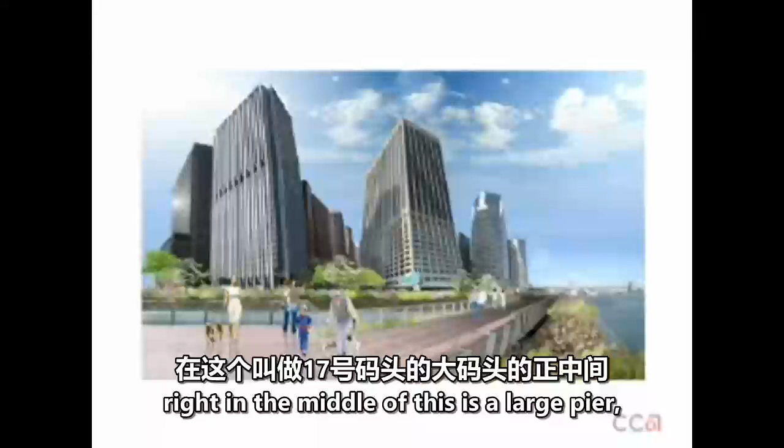But one of the interesting things that happened was right in the middle of this is a large pier called Pier 17, which was a Rouse development, the sort of festival marketplace shopping mall guy from the 70s and 80s. And it's just this awful part of New York City that actually no one who lives in New York ever goes to.

And the Rouse Corporation was sold to General Growth Properties, GGP, out of Chicago about 4 years ago. And they liked what we were doing in the whole neighborhood, and they said, 'Well, will you take a look at our site? We have this 5-acre waterfront site with this shopping, it has a 3-story internal shopping mall on the waterfront in front of the Brooklyn Bridge.'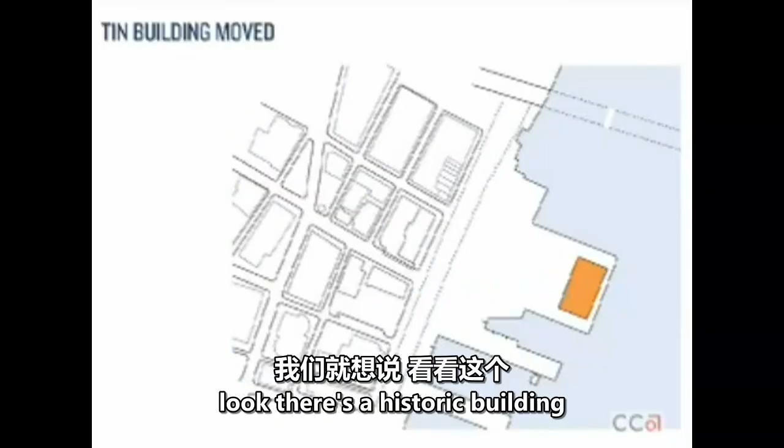Good idea. And so we did look at it, and we said, look, there's a historic building that's up against the highway. We said, it was an old fish market building, move it back and reestablish it at the water's edge. We said, get the network of streets and the esplanade and the view corridors into that space.

Fill it with a kind of small filigree of smaller, lower buildings, and then make about 2 acres of open space for a grand piazza that would face the Brooklyn Bridge and the historic ships to the south, and transfer that FAR into a slender tower on top to pay for what actually turns out to be almost 4 acres of public park that would be given to the city.

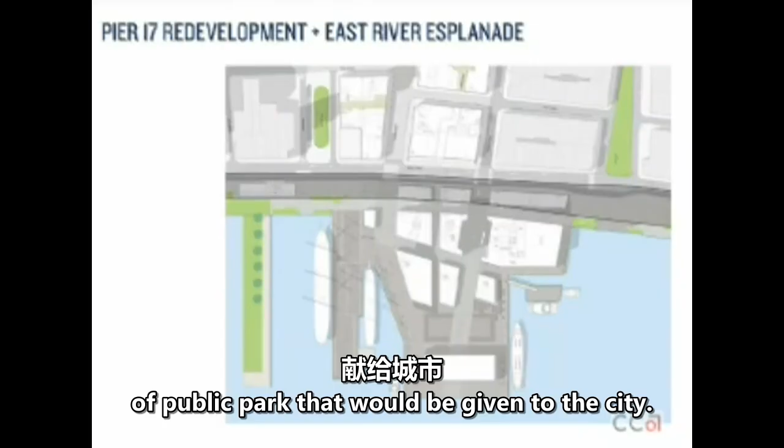Well, the diagrams died. And then these are the hotels that float up above, they're actually hung from 4 super columns, and then it's a kind of gantry, and the hotels float above the low-lying retail stuff.

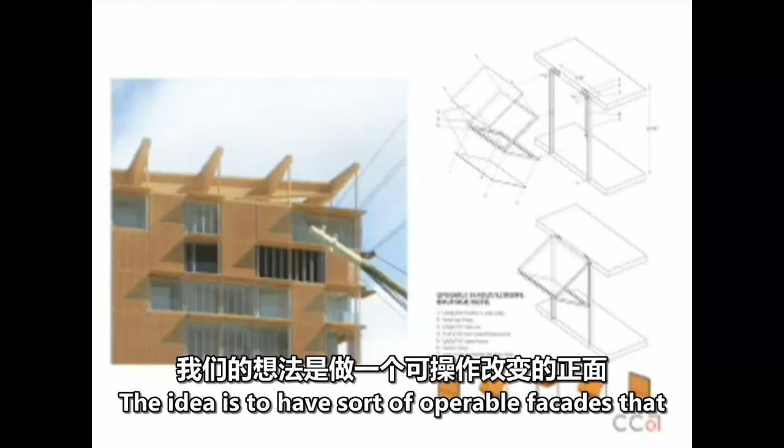The idea is to have sort of operable facades, that would be a bifold door that every room would have its own remote control. So from bed, you could operate your shade, which would open or close your room. And every time you would see the hotel, it would be a different configuration.

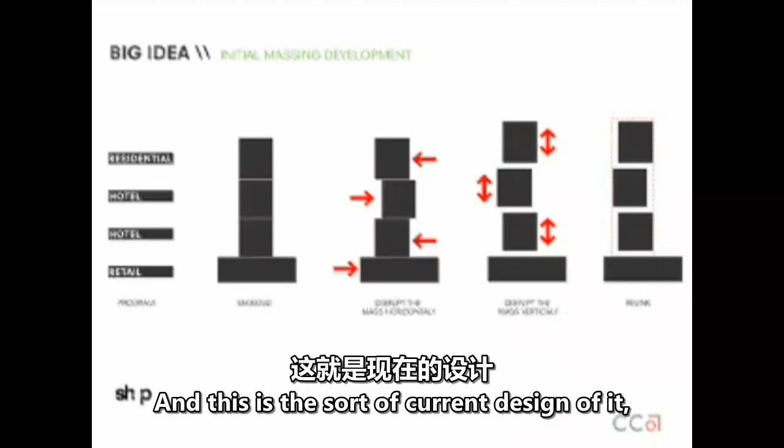And then the tower, which was the trickiest one, obviously, where we were trying to dematerialize the tower as much as we could. So we started shifting the volumes and separating them, and then the idea was to float the 3 volumes of the building within an exoskeleton superstructure that we would sort of break down the mass. And this is the sort of current design of it. It's steel clad in terracotta.

The community's actually supported it. City planning supported it. The Economic Development Corporation supported it. We're fighting with landmarks right now, but we think we can win.

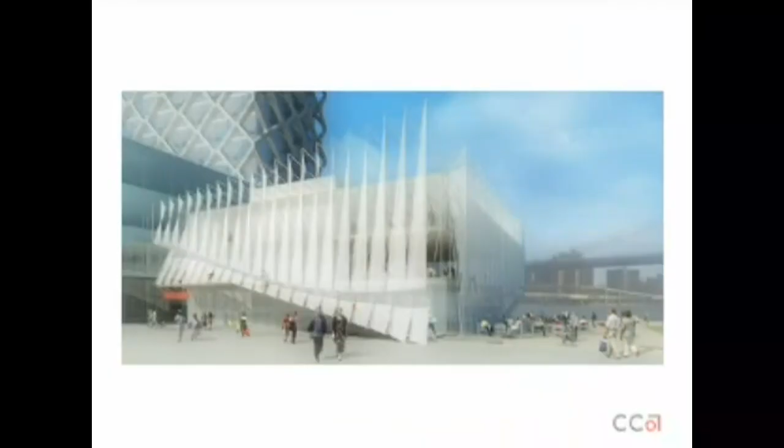The big problem, this is one of the restaurant pavilions, and the big problem that we're having right now, though, is that unfortunately GGP stock, which was $67 a share when we started, closed at 45 cents a share this week, or last week I guess I should say. So they're not really focusing on it right now.

But hopefully they're looking for a joint venture partner, and we're probably 85% of the way through the approvals process, and we're keeping our fingers crossed. And then that's one of the piers from the park, and the Esplanade moves all the way through on that spot.

So to the sort of last project that I'm going to show you tonight, which was the Fashion Institute of Technology, which was a competition that we entered actually probably 2003 that we won. I know this is very depressing how long all this takes, but...

FIT is this kind of brutalist campus in Midtown Manhattan, and has all these fantastic programs, but the people in the city can never sort of see what goes on there. Very different feeling from your buildings here.

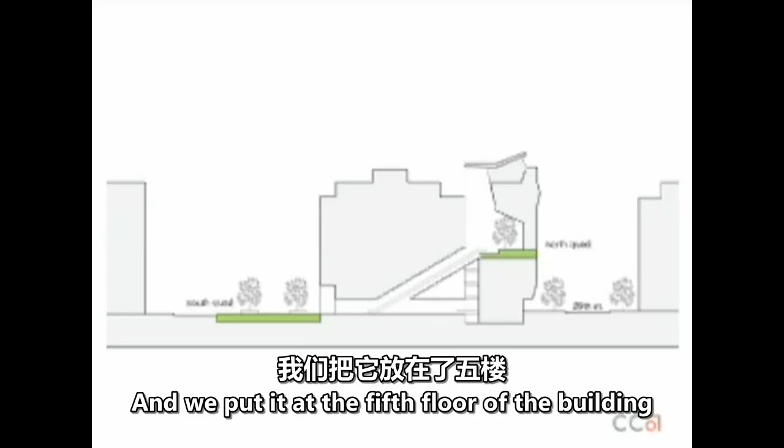And we put it at the 5th floor of the building because that's the floor that all the bridges connect all the buildings to the other buildings on the campus. So you kind of have the outdoor quad at the ground level and the indoor quad at the bridge level. And so again, it was this idea of making this kind of thickened facade that embedded all the kind of circulation, the exhibition, and the critique spaces for the building.

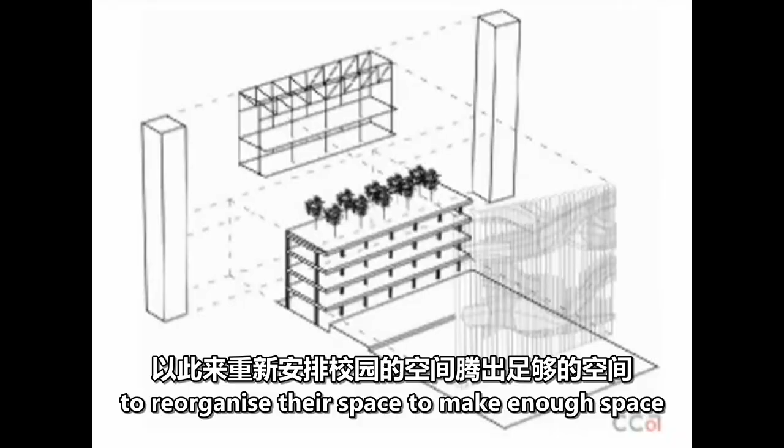We've actually spent the last 2 years both drawing this building and renovating about 60 labs and other buildings to reorganize their space, so that when we start building this, they can keep the university functioning while we build the new building.

It's a very simple idea where there's two concrete towers, and a standard loft construction building with all the classrooms, and then a large truss that hangs the seminar rooms and faculty offices above, so that the quad is column free, and then there's this one highly specific element that becomes that thickened facade on the front.

All of this is made very simply, except for that facade, which is made exactly like the camera obscura is made. Embedded in that thickness are all the circulation for the building and the critique spaces, the exhibition spaces, runways, and other elements.

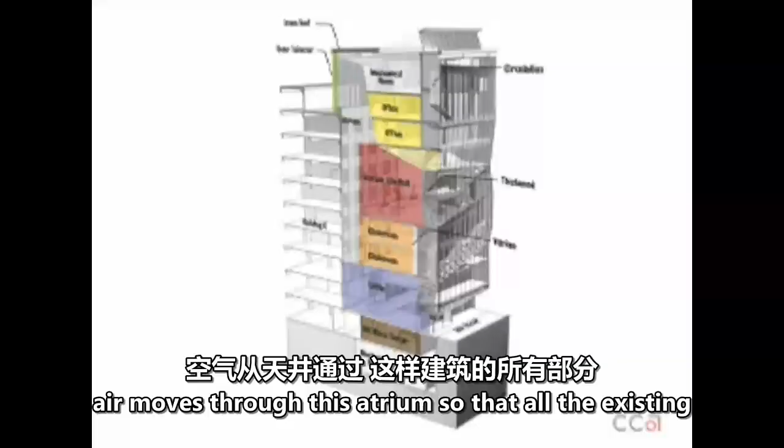All the projects have a strong sustainability component embedded in the performance and the way air moves through this atrium, so that all the existing building portions can still get natural ventilation, even though this building is right up against it. This is the current thinking on the facade.

This is the model at the end of design development in our office. You can see the escalators embedded in there.

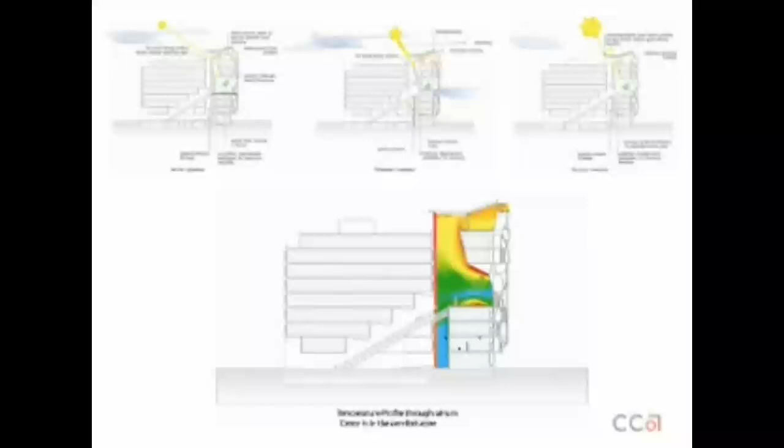Some of the CFD modeling that was done helped generate the form. You can see the thickened facade on the front there. That's a view looking through that thickened facade into the main room.

And all of that whole facade is actually hung on cables. This is looking into that sort of north quad, if you will. So it's really almost like a thickened piece of fabric that hangs on the front of the building. And looking west.

We were working on it in October. The state had given the city and the state were 50-50 giving money for it, and the state had given its money, and then with the economic crisis, the city balked, and everything went on hold.

But we just found out that it's been part of the stimulus package, and we start tomorrow building it again. So we're hopefully getting it in the ground. We have to get it in the ground by November, that is our president's rule. So it will be in the ground by November.

So the ending thing is, we're thinking about all of this stuff, and we started saying, like, could we just get rid of the client? Would that work? So we started thinking about that as an idea.

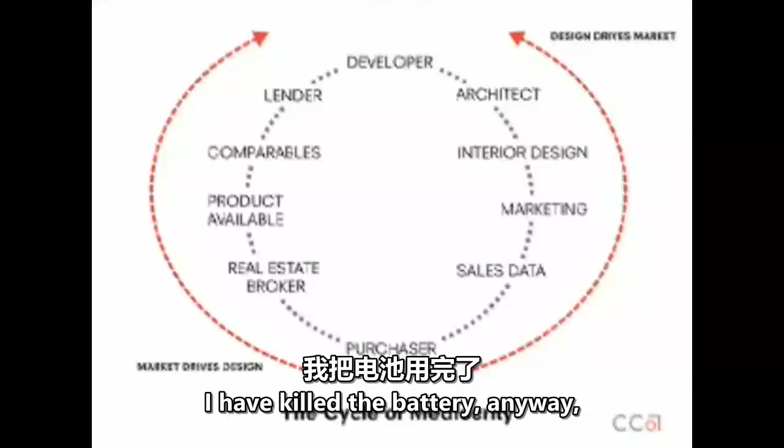Everyone sort of blames the developer for the lack of creativity, the kind of thing that we as designers always have to fight against. But it's really not the developer that's the problem. The problem is this guy. That's the problem, because the developer will build anything that the bank will give them a loan for.

But the lender will only give a loan for something, and what they'll say is, I want 5 comps, right? And comps are comparables. And what does that mean? I want to see the 5 other buildings in this neighborhood that are designed exactly like this, and I want to know exactly how much they sold for.

Of course, those comps were what the products were that were available, and those were the only options the purchasers had to buy, which drove the sales data, like, people really like granite countertops. I don't believe that, it's just they only had the choice of granite countertops. And that drives the marketing, which pushes the interior designers, which forces the architect into this horrible position.

So for us, it's like, how do you break that cycle of mediocrity? I think a lot of it came from trying to grab back territories that have been given away by our profession over the past 30 or 40 years. We try to make ourselves specialists instead of what we're really good at, which is being generalists - knowing a lot of things about different stuff and synthesizing that aesthetically and spatially. What we're not good at is being specialists just about image. We can do it, but it's a weak position because you're not taking any risk.

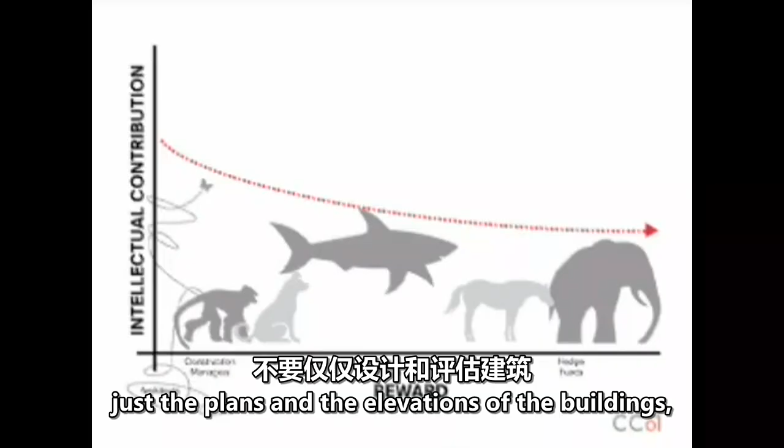The fact of the matter is, until we're willing to get dirty and expand out from just composing images of the outsides of the building, until we can get into the thickness, get behind and past just the plans and elevations of the building, learn the technology, learn how it goes together, learn the finance, learn the politics, and bring those things together, we're never going to progress.

That's what I'm talking about, sort of doubling down - this idea that the more we can take what we do so well, which is this wide-ranging skill set... we do something that very few people can do. We invent something in the future and solve problems three-dimensionally, and then we convert them into a language for other people to reassemble what we had once thought of. That is a very difficult thing.

But if you're only going to do the imagery of it and you're not going to get into the thickness of it, you will never be in the position of taking risk and you will never be in the position of gaining reward. So that's really what we're making a call to do - to take what we do and do it well.

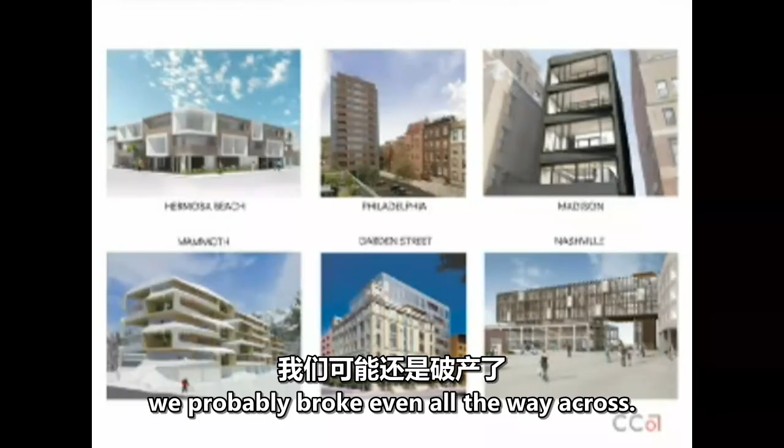Now, these are 6 buildings that we took huge risks on. With the world falling apart, some of them we made money, some we lost, some we broke even. But at the end of the day, we probably broke even all the way across. It didn't matter - we got 6 buildings built, and we started to really think about how we do things, and we understood a lot more about the process.

So what I'm saying is that it's not to say every project you do when you go out and practice yourself should have no client. Of course, in different kinds of projects, you have to work in every one of these configurations, and you need to be flexible to think about all those different ways of doing that. The idea is to take what we're really good at and expand that as much as you can.

So what SHoP has tried to do is all the real estate stuff that I've talked about - we've started a BIM consulting and construction management company, and we've even started a software company where we're writing new kinds of programs for what future designers are going to need in order to get into that thickness.

Some of these might be successful, some might fail, but it doesn't even matter to us. It's part of a think tank and part of an attitude of expanding what we can do as designers to really play a bigger role in the way space gets made.

So I'm not calling for a new style or a new period or a new theory or a new philosophy. But what I am calling for is - it's an amazing time to be a young architect, because what's happening with technology is creating such a huge paradigm shift that this is the moment you can grab those territories back.